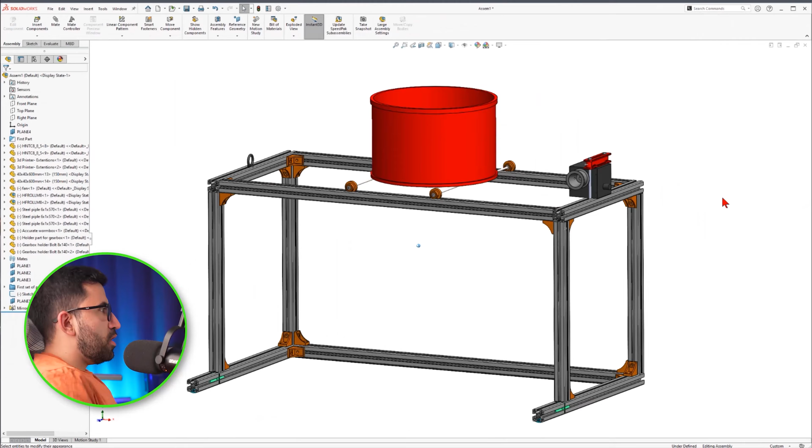Let's do it. If you look at my monitor, this is the scaffold that I designed. I decided to go for aluminum extrusions because it reduces my manufacturing costs when I go for off-the-shelf products. If I want every single component in my model to be customized and machined, I'm going to have to calculate it with more price. So it's cheaper to go for the batch produced components, aluminum profiles being one of them, okay?

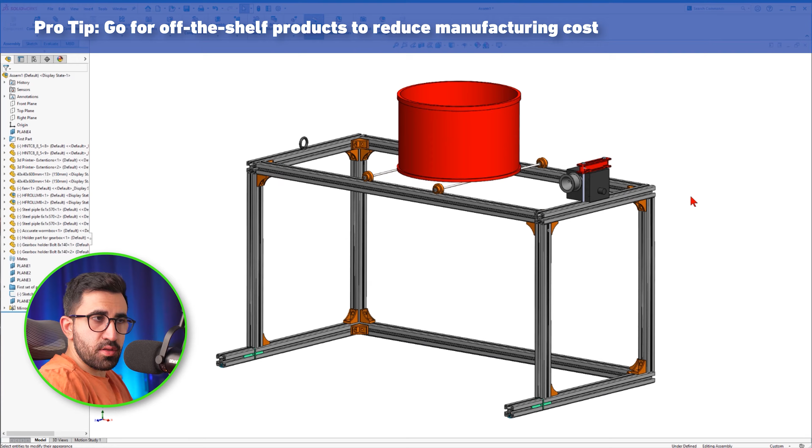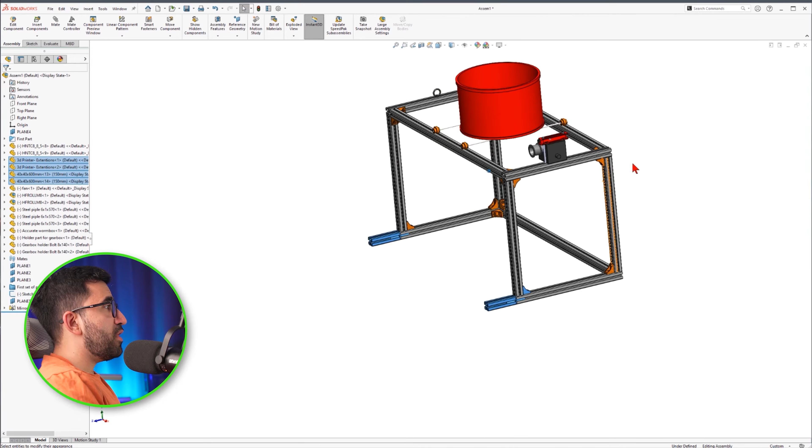So the structure is made of aluminum profiles in different sizes, and at each corner we have 3 corner connectors to hold these scaffolds together. There are 2 extensions which you can see here and here. These 2 components, I've only designed them to increase the length of the bottom just in case if I need it, because if the whole thing was bigger, it would not have fit through the bathroom door. So I made it shorter, narrower, so it can go into the bathroom, accommodating some extension.

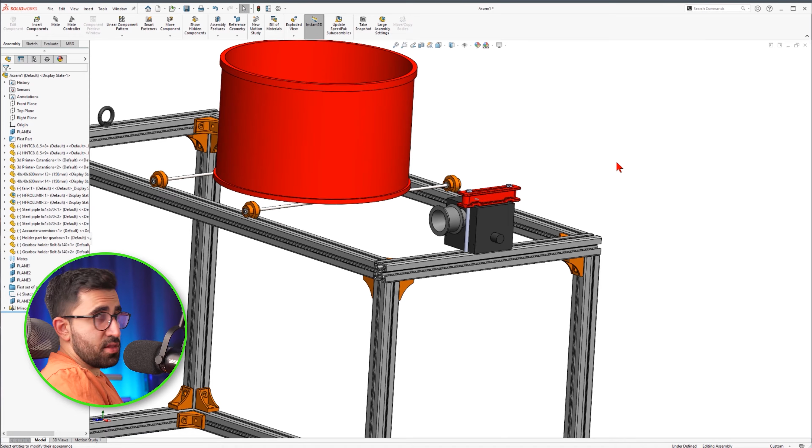Over here, you see this black box with this red component on the top. By the way, everything that is red is being manufactured, purchased by me. These are customized components. Everything else is off the shelf and standard component, okay? So far, me being the modeler, have made something that I know can be purchased somewhere from some store. I did not come up with some cross section and tell my client, okay, go manufacture this, go extrude this profile, and hopefully it will do the job. I have reduced his cost by going for standard components.

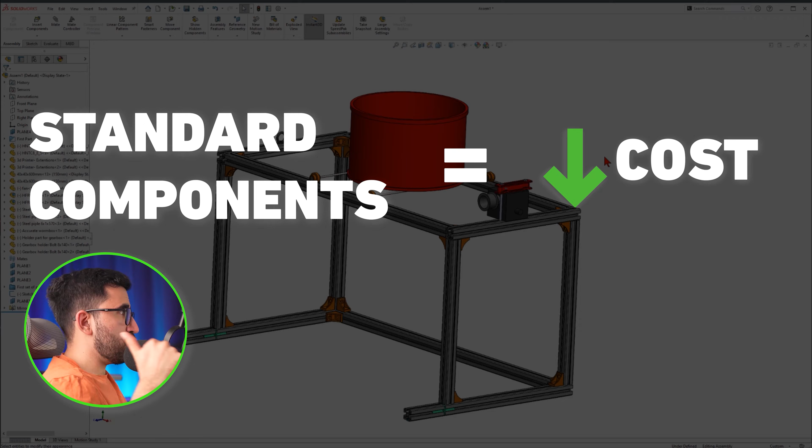Just put that as one point on the side. This black box over here is the gearbox, which I've modeled myself. Roughly the dimensions are right. It's a worm gearbox. The red component on the top is going to be a fan, an industrial grade one to dry my dog. If it's too loud, then I might not use it, but I have accommodated that into my design. This gearbox has a pulley on the side, which you can see here.

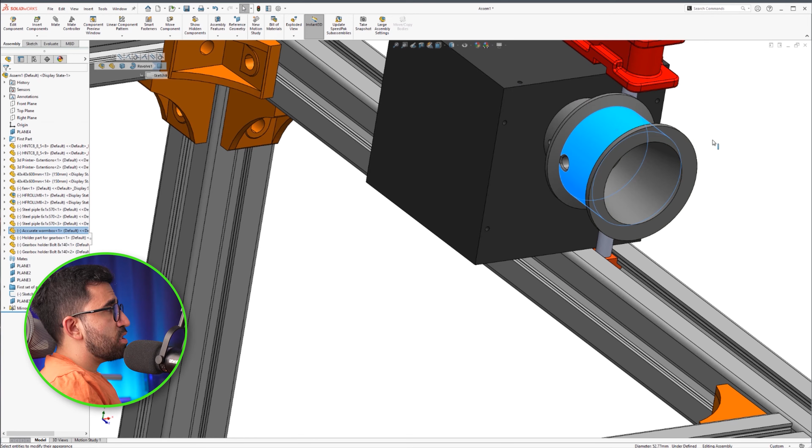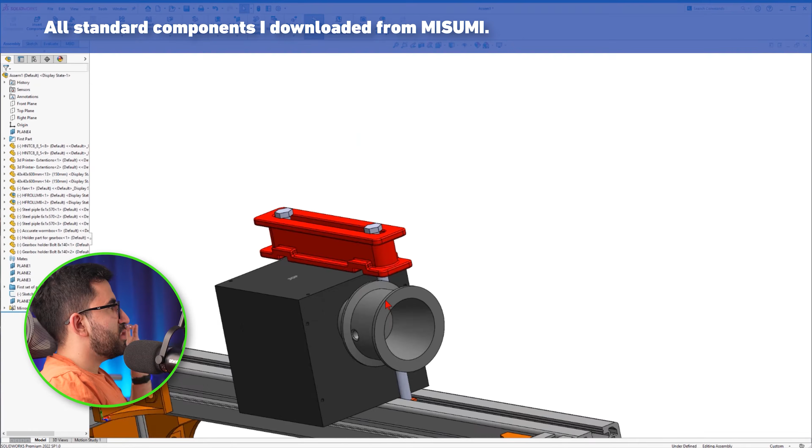A cable is going to roll around this pulley as it turns, and the other side of the cable is connected to this loop at the end, which is connected to this orange component, as you see here. And this orange component, the hook, the aluminum profiles, the corners, these rods to hold the fan, and these wheels to move along these aluminum profiles, the gearbox, everything that connects it to the profile, everything is downloaded from the website Misumi, which I told you are the sponsor of this video, and I will show you how.

I did not model a single thing except for the red components. In this way, I have secured a couple of things. First, I know for a fact that these components fit together, so I don't have to take care of tolerancing and whether or not they're gonna fit together. That's guaranteed. Secondly, I did not model any of these components.

These are all downloaded. First of all, knowing what to design, secondly actually sitting down and designing it takes time. I did not do that. Instead, I spent like 1/10 of that time to find the item that I want in the size that I want, and I pressed download. That's that. So the quality of my work at SolidWorks, tolerancing and fitting, these two are already taken care of.

The third component we talked about is manufacturability, and these components are already manufactured off the shelf, living in some storage somewhere. So all three elements are already taken care of, and I've done it in a much shorter time.

If my job was to only model this, all I have to do is give the item number of these components and the website to my client and tell him, hey, go purchase these components, and boom, they're gonna fit. It works. I've made the mechanism for you.

But since I'm the client myself, I'm gonna go and actually place the order, so you see the whole process, because it comes with an extension for SolidWorks, and when I click OK, it actually sends the order to Misumi, and you get your components delivered and you pay for it.

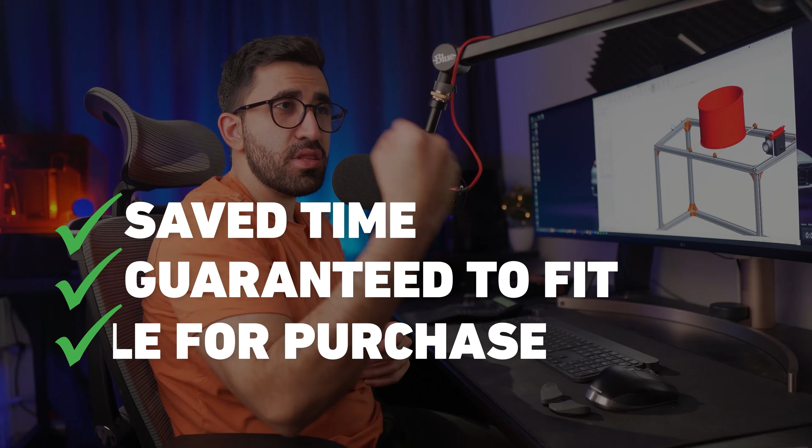It seems to me it's a smart way. I did all those things in a much shorter time, so I can add the value of the time I have saved, plus the guarantee of fit, plus the guarantee of the component existing, into my hourly rate.

The website looks like this. When you go in, you need to sign up and create an account. It is free, no need to pay anything. It just needs your name, email, and some information, maybe address, I don't remember, and it comes in different languages.

What I have found is that most things a mechanical engineer, biomedical engineer like me needs can be found under products, automation components. There are so many more categories. Just read the categories, I'm not going to read it for you, but if you go to automation components, most things can be found here.

For example, if I go to pipe, tube, hoses and fittings and go down here, I will see steel pipes, which I have already used. Or if I go to framing, I find aluminum extrusion and brackets. You click there. Let's just download one aluminum extrusion for the sake of the example, and then I'll show you.

There are different sizes which you can filter on the left, the size, the form. I'm not an expert on aluminum profiles, but I'm sure a lot of you are, and these terminologies make more sense to you than they do to me. So some components are more suitable for some people and some skill sets, right?

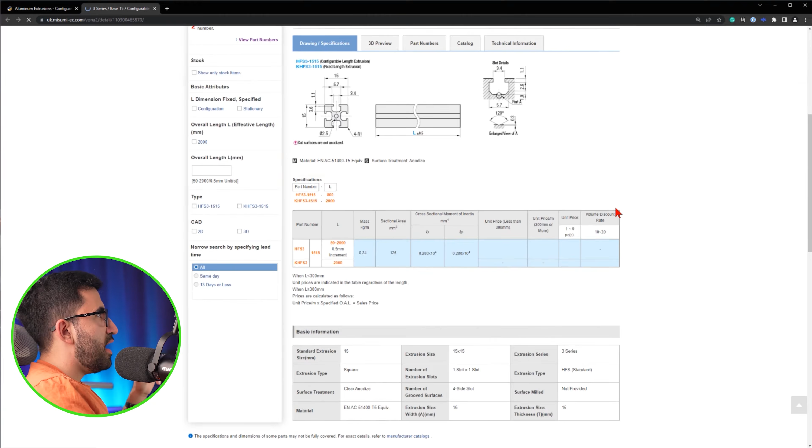Let's just say we want this. I don't know what that is. Let's just say we want this. And on the top right corner, we see CAD download.

When I click on that, it says you have not defined your component to be specific enough, so there is no CAD for it. First, go ahead and be more specific about which component you would like, then we will give you the CAD file.

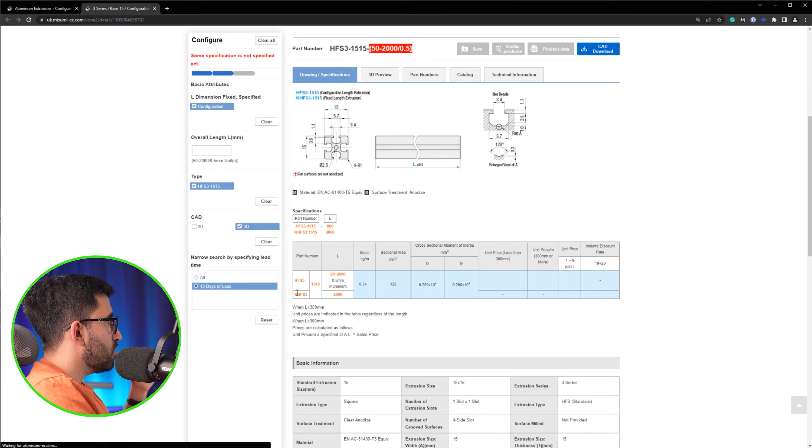Okay, let's just add some filter to it. I don't know, let's just go for this—is it not ready? No, not specific enough, 3D. Oh, the length. Okay, so let's just go with 1000.

Now I get the option, so I will find SolidWorks first. Then we're gonna go pick SolidWorks 2006 and above, native, and then it generates the CAD file for me. It's ready, let's just open it.

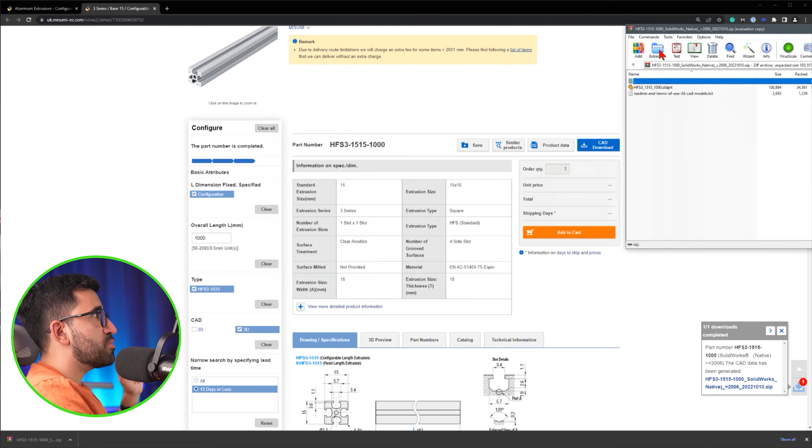Looks like a zip file. Let's just bring it to the screen, click on it, and then boom—this is the aluminum profile. How much time did it take me to find this? I mean, if I actually wanted to look for something specific, all I had to do was spend about 10 minutes.

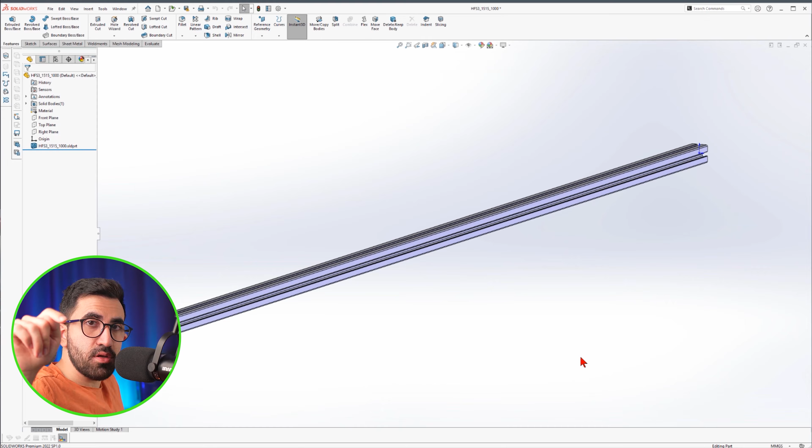That 10 minutes you're going to have to spend anyway when you create or model this from scratch yourself, you need a drawing of the cross section. This way, the 10 minutes you spend on drawing, you just look for the final component and download it, and voila, you have it in SolidWorks. Every single component you see here is downloaded by me, and all I did was assemble them together.

As easy as that. Now you're going to love this because Misumi has an extension you can add to your SolidWorks, and it opens like a window with the directory of all the components they have. You can search for anything, drag and drop it into SolidWorks, either part or assembly, then customize it. Once you're done, it creates a bill of material for you, and all you have to do is place the order or check the price. It does everything automatically. This is the extension for SolidWorks 2022, which was released a couple of days ago.

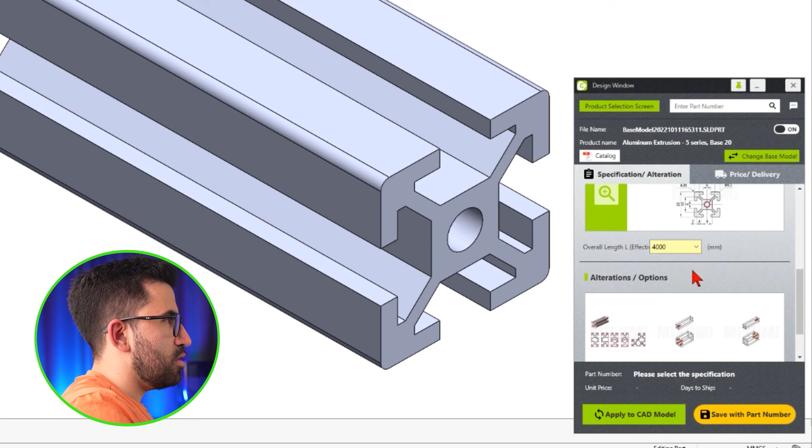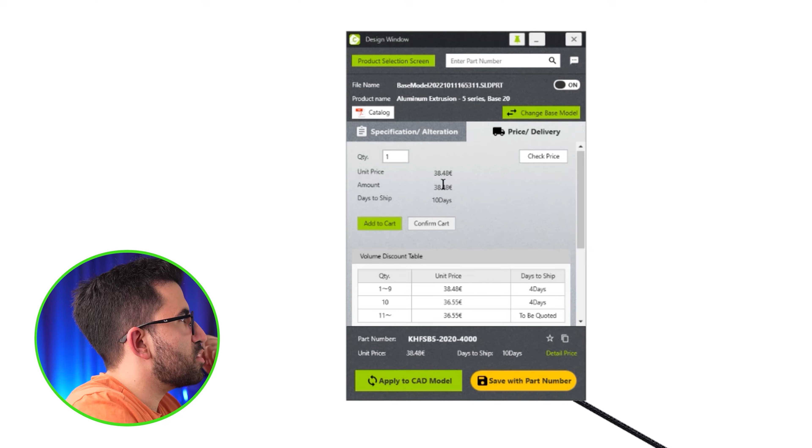For example, I have this component built here with Misumi parts. This is the extension for Misumi. Search for aluminum extrusions, cross section, size, click on import. Successful. Black anodized surface finish, stationary, and length 4 meters. Apply to CAD model, and the length should adjust. Now it's adjusted, and I could just save the part with the number, as you can see here, or go to the price delivery tab and read the values. This component is 38.48, quantity 1.

Add to cart, confirm cart. You could do everything here. This is amazing, it makes your job much easier.

So instead of— I'm sorry, I take this back, it's not instead of. You still have to improve your skills. You still have to learn how to work with tolerances, because that's the value you eventually need. But this is kind of like a joker card in your pocket, you know? It makes your job much faster, buys you time to be ahead of your competition. You use that time to charge more and work on your other skills.

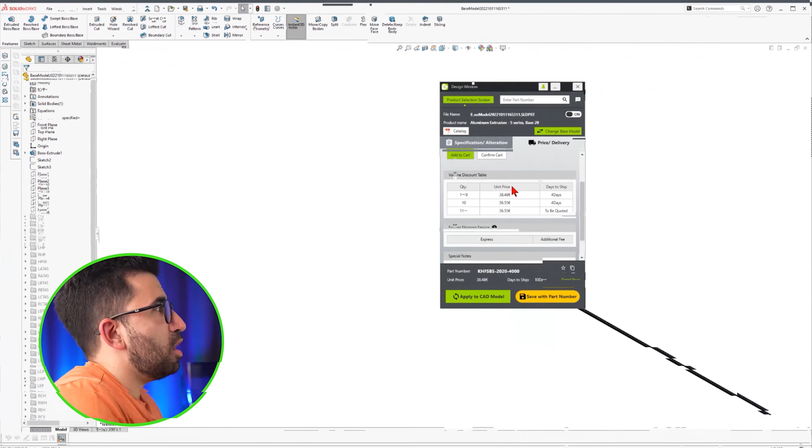As I promised, by the end of this video I'd give you a way to take a shortcut and go faster, and this is the shortcut. Now all I have to do is order these components I used from Misumi to build this frame, get the components, go assemble them together, and go wash my... Yeah, the components are here. Let's open them, assemble the frame, and then I'm gonna go wash my dog.

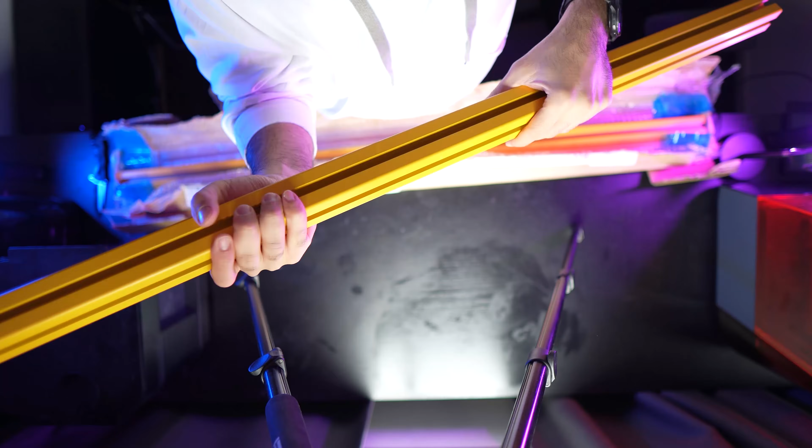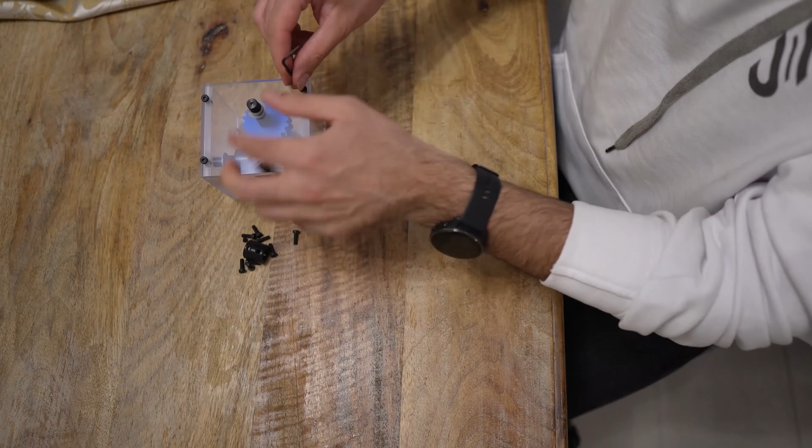So this is the gearbox. As you can see, the white parts are 3D printed by me, and I bought the cables. They're connected into the pulleys, and this is the eye bolt that connects into the profile. This is the orange component in SolidWorks, as you can see.

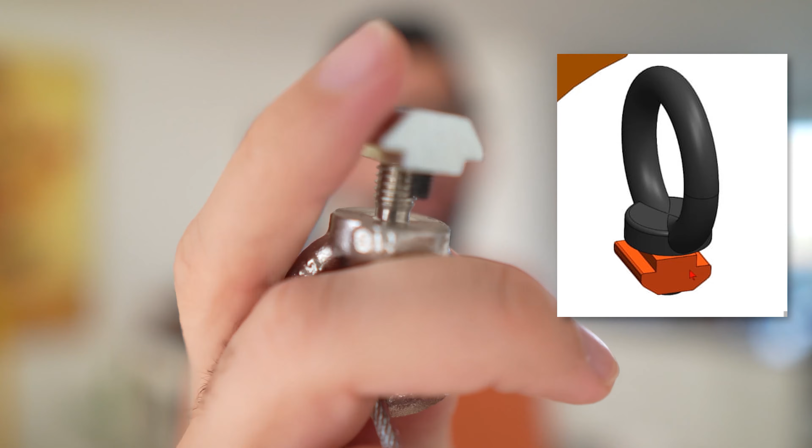A worm gearbox is very strong, 1:65 ratio, but if you want to rotate it by hand, you're going to have to do it a lot of times. So I have a better idea.

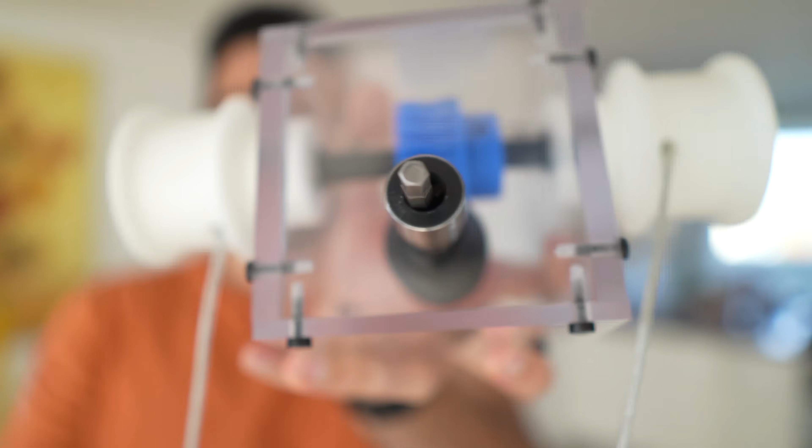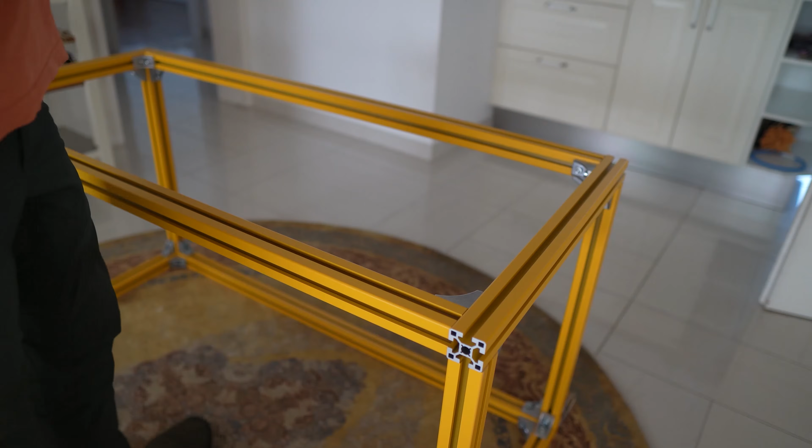Look at this. This is going to be the engine, and this is going to be the gearbox, and the cable is going to connect to the frame. Let me show you. It's going to sit here.

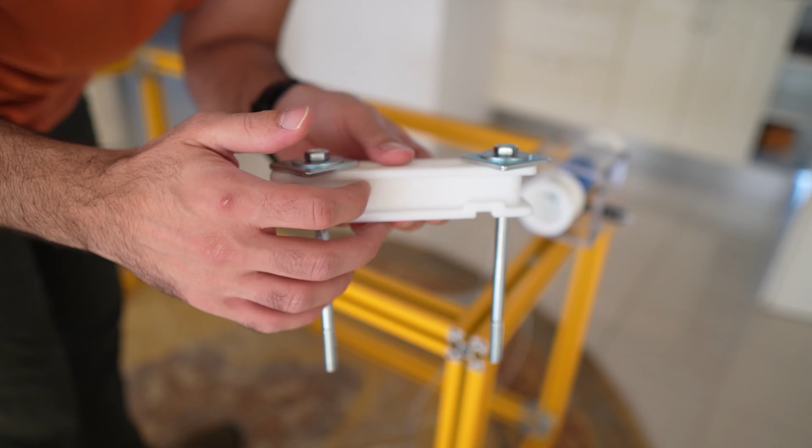I'm going to use two of these, one goes here, one from the other side. Then I 3D printed this component because it was a miscalculation and I did not find shorter bolts. This is just to keep the distance right. It comes on the top and gets screwed down into these bolts.

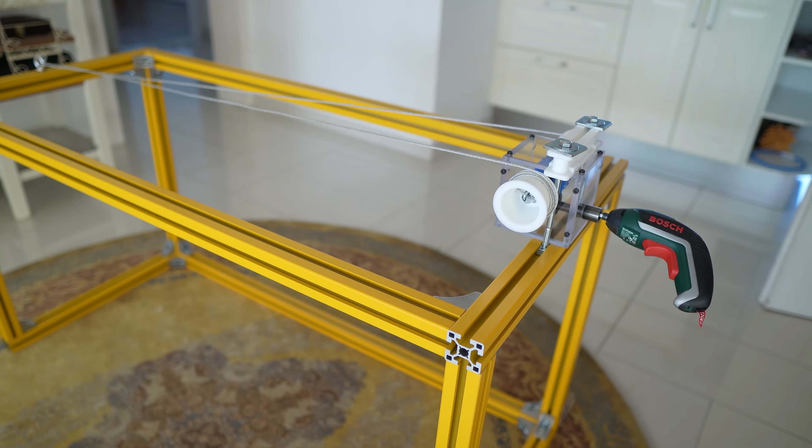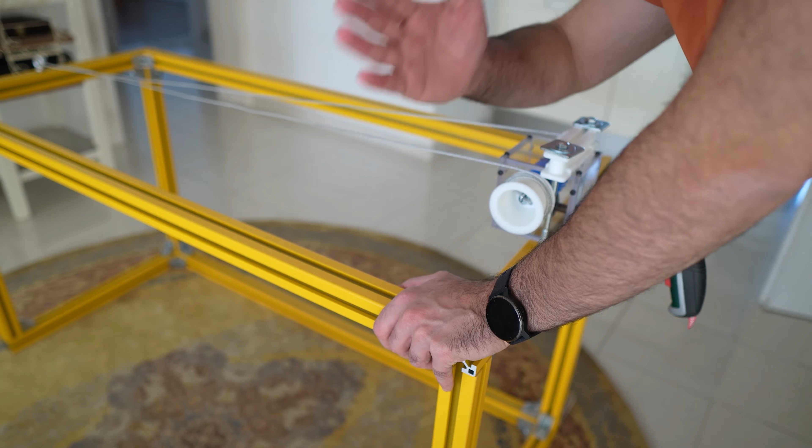Now let's test this. Good, now the cable is here, you see it. I'm gonna hang Goldie down to this cable, and when this cable comes up, it comes up. The good thing is, when I put the frame on the bathtub it's already concave, so it adds to the height of this. That's why I'm sure it's gonna be staying mid-air. Now the other components that come here with the wheels and the pipe, I haven't put here. The fan is there, but let's see.

The mission was a success. I cleaned Goldie, nowhere is wet, and it worked.

At this point, I want to show you how you can benefit from Misumi in a way you did not think possible. Regardless if you are working or you are a student, each of these groups can benefit individually from Misumi. Let me tell you why.

Let's start with the students because the second part takes longer. If you are a student and you are given a project to create and come up with a cost estimation, the manufacturing cost for your model, you cannot find a better place than Misumi. Why? Because every component that you find, download, and use in your project comes with the accurate price. So every single unit that you download has a price. And by the end of your project, after you have assembled all the components, you have an accurate cost estimation down to the cent, and you can use that as a frame of reference to build upon.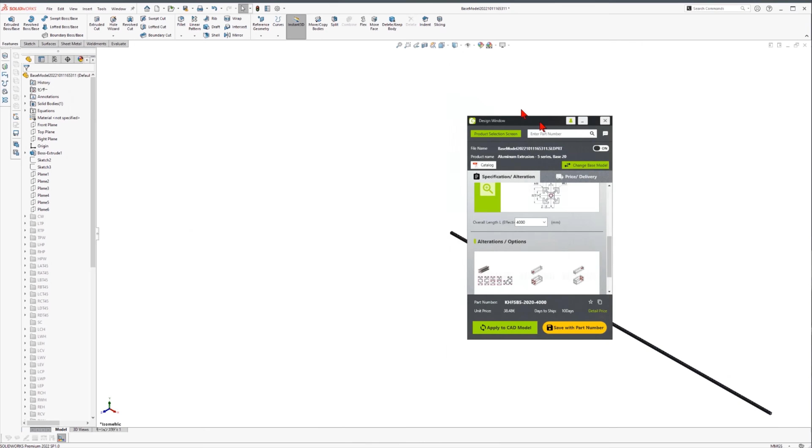You could actually put your focus and spotlight on creating those customized components that you need for your project. You don't waste your time modeling standard components anymore. You just go here, download it, you know the price, and then you put your time, which you now have more of because you've saved a lot of it, into the customized components that cannot be found off the shelf. You design those and you're good, you just assemble it, you know the cost, and through the extension that I showed you, click order, send your order to Misumi, get your quote, and the rest is history. I cannot recommend this enough, and I love it.

I'm not gonna sit down and model another standard component again. If you're starting on SolidWorks and you need practice, sure, go ahead, model standard components because it's necessary for you to build up your skills. But after a while, once you've learned how to deal with those things, you don't need to repeat that. Work smarter, save time, save money, and charge more.